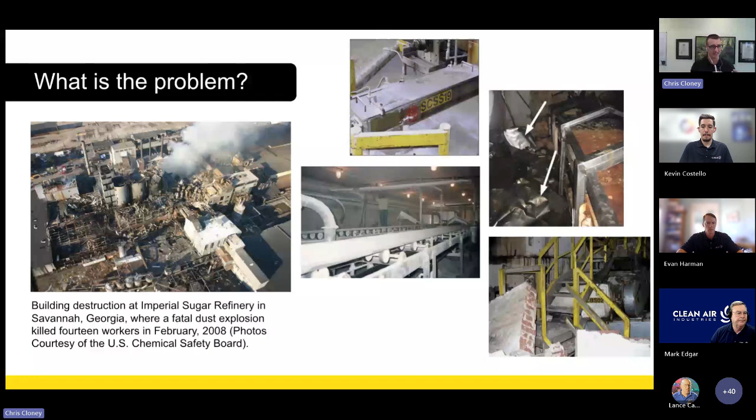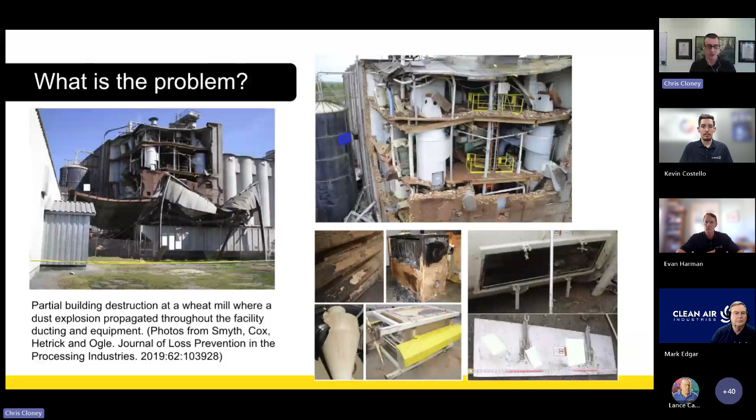You also have cases where you have explosions just in, we'll call them small, I mean that's not a small dust collector, but small pieces of equipment, bucket elevators. So you have large losses with secondary and tertiary and quad, the four-stage explosions, all the way down to small pieces of equipment. Cases where there's tragic loss of life.

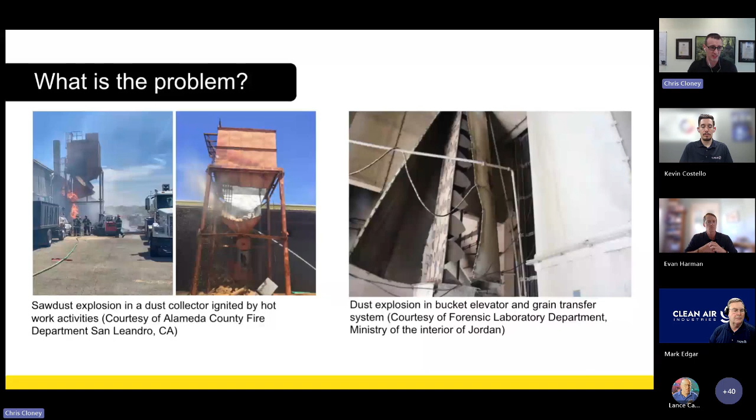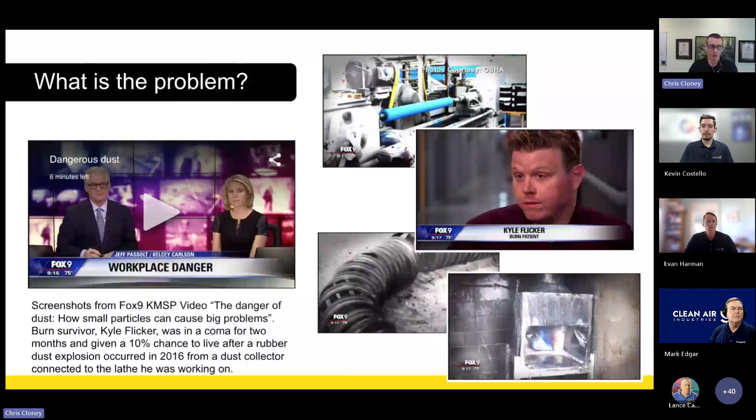The point of showing you these images and examples, and the Clean Air Industries team would be able to tell you this too, is that there's a wide range for combustible dust. Just in those short slides, just in that 3 minutes, I've talked about rubber, aluminum, wood, grain, talked about fugitive dust with dust all over the place, real lack of cleaning and collection, talked about no fugitive dust, still entire loss of a building.

We talked about personal safety, impact on one person. We talked about site safety, impact on an entire building. That's the big challenge we have for combustible dust in general: we have a lot of different ranges of scope, a lot of different ranges of size, a lot of different materials and industries that we're working with.

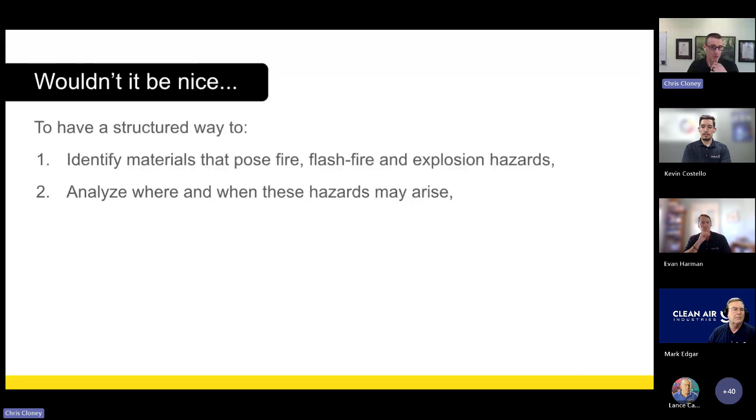So the overall summary then is, wouldn't it be nice to have a structured way to identify the materials that cause the hazards in the first place, to analyze where and when these hazards come up, to evaluate what safeguards are needed, and then recommend and track progress against improving these safeguards. That's the sole purpose of the dust hazard analysis process as outlined in the NFPA standards: to give a qualified person that structured way to assess these hazards, given the breadth and width and depth of the challenges associated with combustible dust.

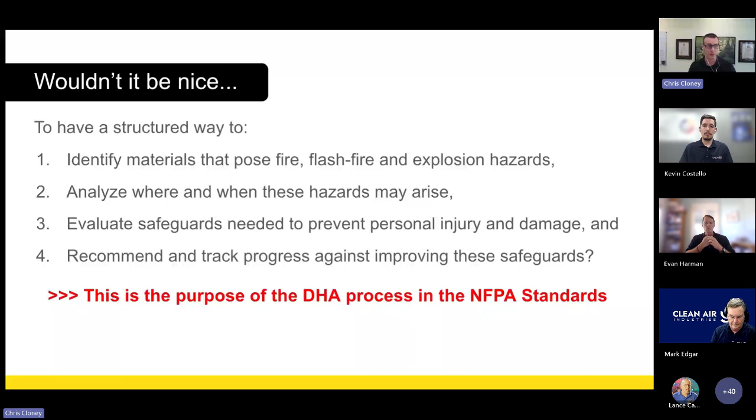There's been a lot of talk recently about NFPA 660. Some folks haven't seen it yet, so just in case you don't know, any NFPA standard is available online for free. Just go to nfpa.org/the standard number. I'm actually not sure that's true for any NFPA standard, but every combustible dust one, 652, 61, 484, if you go to that URL with the number, scroll down, you can click view free access. You have to create an account, so not completely free, you've got to give up your email, but you can view the entire document.

So if you have questions about anything in this presentation, or if you see something like, hey, I wonder what that section says, you can access it. I personally use NFPA Link, which I find very quick and fast compared to the old method of printing off reams and reams of paper and trying to scroll through or flip through the thing to find the material you're looking for. You can access it free today.

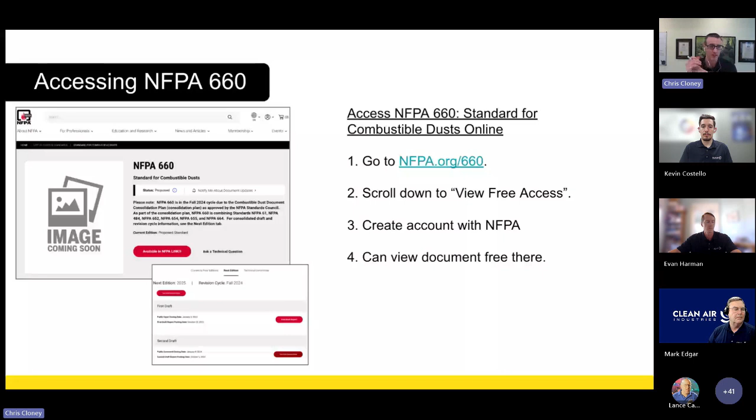This is the structure of what we'll call the past NFPA standards. 652 was the system that outlined that systematic procedure for completing a DHA: how to identify the hazards, how to assess them, how to address them, what management systems to put in place. And then it called out to the green squares, which are the commodity or industry specific standards for agriculture, sulfur, metals, wood processing, and other dusts. It also called out to the how-to standards, so deflagration venting, deflagration prevention, and the NFPA 70 electrical code. That was how the standards aligned. Each one of these was a different document, in a different order, created by a different committee.

And so it was good in a sense because you knew what was contained in it, but it also took a lot of work. You had to read all of 652 and then all of 61 if you wanted to understand the grain, what to do in a grain handling facility.

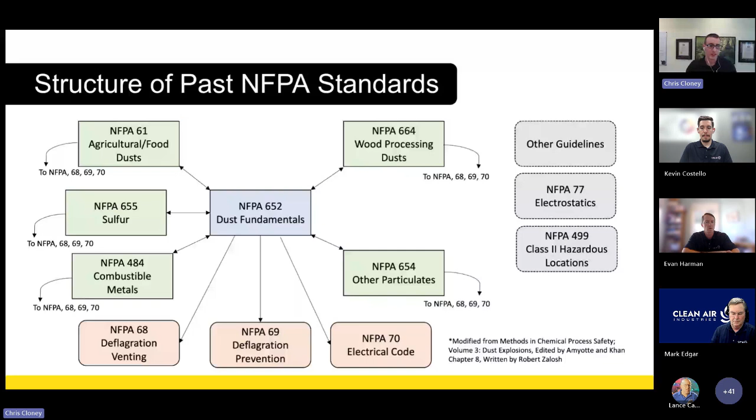The focus for NFPA 660 then was to combine the fundamental standard and those commodity and industry specific standards into one document. So the layout is chapter 1 to 10 is 652, then chapters 21 to 25 are the commodity specific standards.

The really nice thing about laying it out this way is that things are nested. So for example, let's say section 4.3 would be, I believe, the requirements for owners and operators in a facility handling combustible dust. That's what you find in chapter 4, section 3.

If you want to know what additional requirements there were for owners and operators in a grain handling facility, that would be chapter 21.4.3. If you want to know the additional requirements for owners and operators in sulfur, it'd be 24.4.3. All the chapters, all the sections are nested in this way, where you have something in the fundamental chapter, say bucket elevator protection, that's probably up in 9.8. You want to know bucket elevator protection for a woodworking facility, it'd be 25.9.8.

And it makes it a lot faster. If you want to know about bucket elevators between wood and the fundamental standard before, you'd have to read the entire fundamentals document and the entire 664 document. And because things didn't align, you'd have to try to figure out what that meant. So it made it a lot harder.

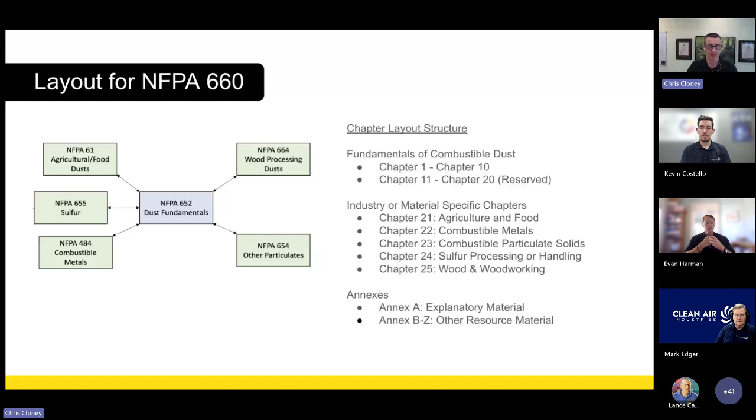These are the general requirements. This was the section I was actually referring to—I guess 4.1, not 4.3. I'm not one of those folks that has the chapters fully memorized and can rattle off the fourth subsection right away.

The requirements for owners and operators in facilities handling combustible dust really have three components. One is identifying the hazards—this is your combustible dust testing. The second is to assess those—this is your requirements for performing a dust hazard analysis. And the third is managing or addressing these hazards. This generally has two components: managing the hazards themselves in the equipment, and also management systems, more like emergency response, training people, those sort of things, housekeeping programs. Those go in a separate chapter.

Those are your compliance options. So that's really the three processes that you'll see in the NFPA standard related to dust hazard analysis: identify, do your testing, assess the hazards using dust hazard analysis, then go ahead and address those hazards with what was identified through the DHA process.

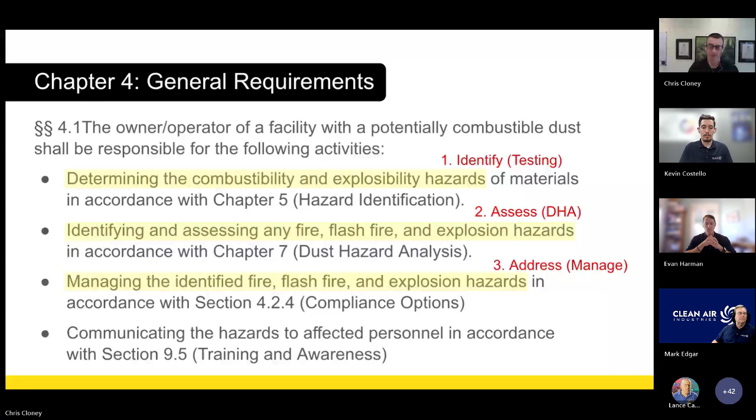In terms of testing, the first step in identifying the hazards is generally doing a screening test. This is a cheaper and faster alternative to doing a full suite of tests. If you get the results back from your screening and determine that you do not have a dust explosion hazard, then you don't have to go through the rest of the requirements related to doing a dust hazard analysis. If you come back positive from your screening test, then you go one of two routes, looking at understanding your explosibility parameters—those are the ones outlined like KST, MEC, LOC, MIE, and MIT in the slide here.

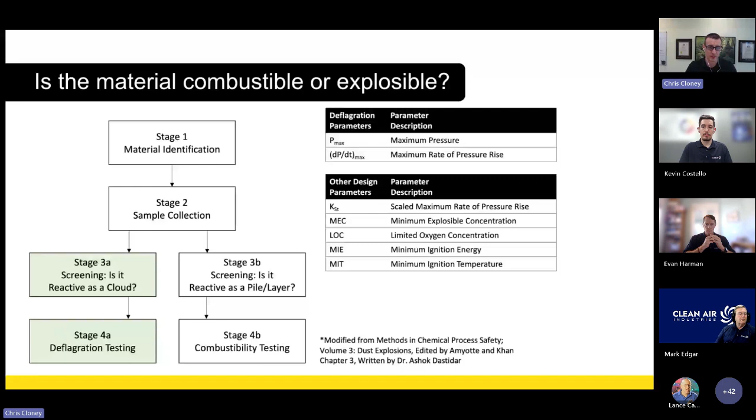And now, well, it always was—you had to look at combustibility and flammability as well. Now it explicitly calls out in NFPA 660, under particular circumstances, that you need to look at flammability parameters as well. So that kind of gives you an idea of the range of tests that may be required when you're looking at combustible dust. I think this is one of the cheat sheets that we pulled off and put in this kind of package that we have for these slides, if you want to grab those.

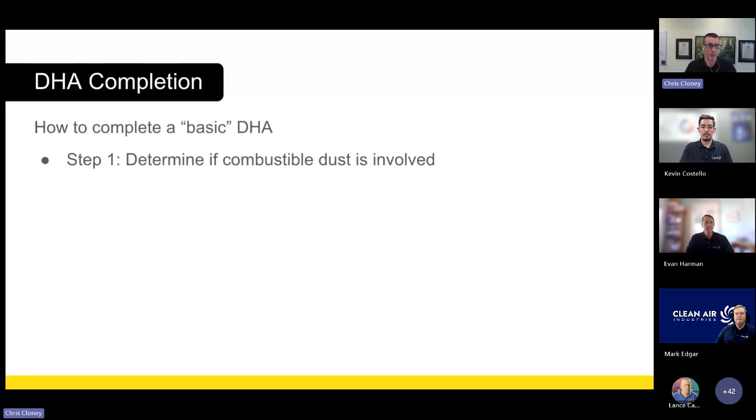I'll give you a really basic breakdown of a DHA process. One, determine do you have a combustible dust—do your screening test. If that's positive, then you break your processing operation into a list of nodes. Add nodes for rooms, buildings, and building enclosures. Evaluate the hazards, evaluate the safeguards, then document your hazard scenarios, your safeguards, and how they match up against the prescriptive requirements in the NFPA standards.

So in those chapters on management systems and equipment protection, think of this: if you had a really simple process, say something that's shredding metal components, you have an input hopper, a shredder, an output bin, and dust collectors attached to it. Then we take a sample probably from the dust collector, do screening tests on it, and find that yes, it is explosible.

Step 2 is the nodes. So you have your input bin, your shredder, your output bin, and your dust collector, plus the ducting between them, often treated as a node, and the room itself will be treated as a node. That's because you want to assess the hazards at all those locations.

The room itself, do you have fugitive dust in the room, or do you have the possibility for fugitive dust? If you do, then you need to evaluate the existing safeguards to prevent that, like dust collection, like having a housekeeping program. Same for the input bin and the output bin.

The input bin, maybe you're putting, I don't know, electronic boards in there. There may not be a combustible hazard, so you don't need to deal with that in your DHA, or you can exclude it. On the shredder side, maybe you do have combustible powder that's built up.

At the end of the day, you're looking to come up with that list of safeguards that are in place and comparing that to the prescriptive requirements in NFPA standards. That's the most basic approach. There are more complicated versions where you can use other DHA methodologies, risk-based assessments, performance-based assessments. This is a really simple example comparing against the prescriptive requirements for the NFPA standards.

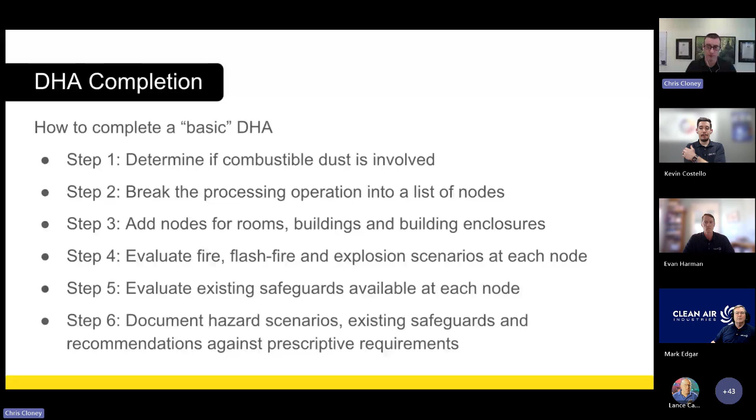We want to dive into some more detailed examples. There is one in NFPA 660, which I believe you can access from the free version. Just go to Annex B, and it gives you a worked-out DHA example, using a more scenario-based approach than the node-based one that I explained. But that will give you an example.

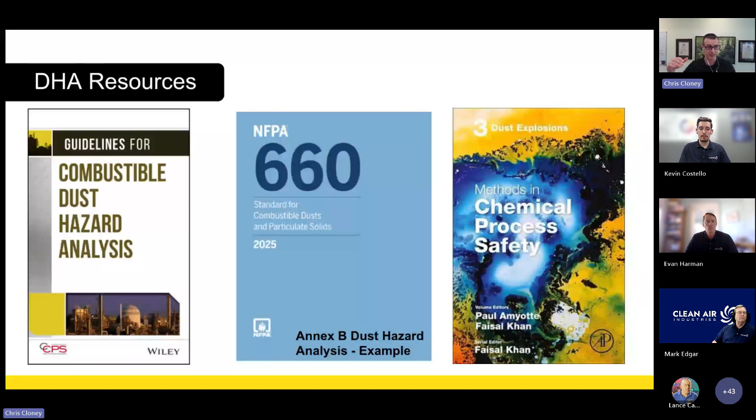So just to close out, this is the list of changes in 660 from 652 and the commodity and industry specific standards. I'm happy you don't have to say that all the time anymore. It'll be good when we don't say 652 plus commodity and industry specific standards - it's quite hard to say that.

But this list is actually in the front of NFPA 660 in the origin section. This tells you, okay, we tried to make this change with most things staying the same, but here's the list of things that actually did get changed with substance between these two standards. I'm not going to go through all of them, but I'll point out a couple that might be relevant to you.

There are requirements now for operational readiness reviews to be done as part of a management system. This is sometimes called a pre-startup safety review. If the equipment is down for a long enough time, or you're starting a new piece of equipment, there are requirements for what kind of review needs to be done before you turn that on.

There are new requirements to evaluate self-heating, thermal instability, and water reactivity under certain circumstances. That was always sort of included in evaluating fire, flash fire, and explosion hazards. Now it specifically, or explicitly, spells out when those would be required as part of your assessment.

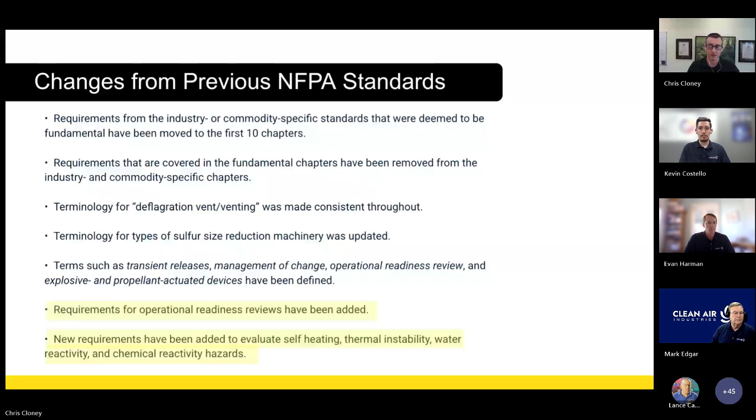There has been some text added in a few places on the level of protection provided by flame-resistant garments. This is something newer to the standard, but it's something we see when running our combustible dust incident database, in terms of the protection employees have when they're impinged on by a dust deflagration.

Really important - there are specific elements now on general safety training and job-specific training, and the frequency with which those need to be completed with your workers.

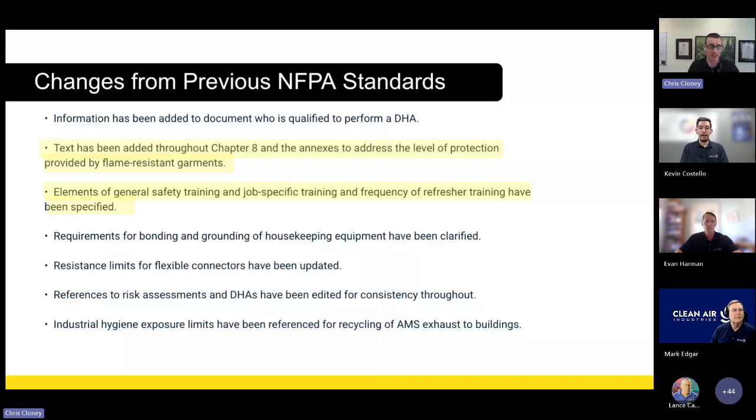And the last ones I have here: some guidance on responding to silo fires, and there have been more requirements added to ag and food in terms of the type of equipment that needs to be assessed during a dust hazard analysis.

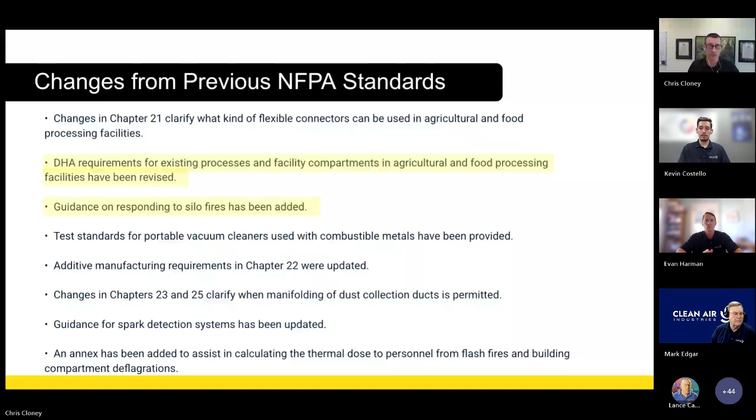So that's it for my contribution. Again, this was really meant to go through high level 660, what's new, and a little bit on dust hazard analysis, give you some resources you can walk away with, and really set the stage for the clean air folks to talk through things as well. So if you have any questions for me on those topics, please send them through.

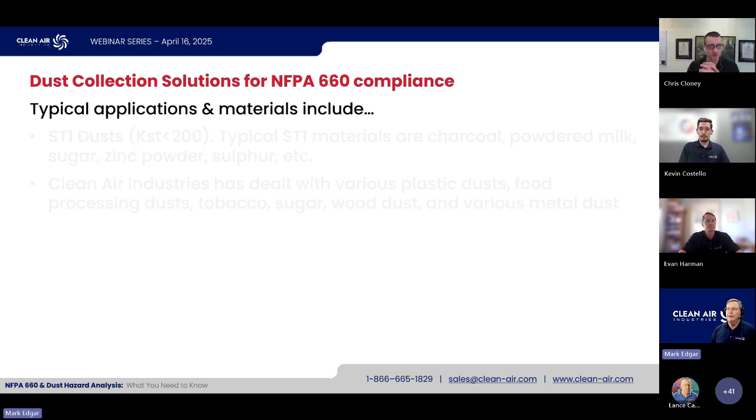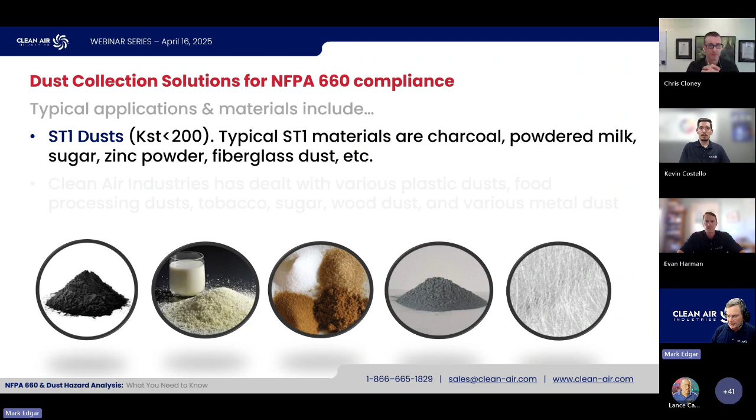All right. Good afternoon, everyone. So I'm going to talk a little bit about the equipment that we have that we provide for different solutions that would meet the NFPA 660 compliance. So typically dust that we deal with, ST1 dust mostly, with KST of less than 200. And those types of materials are like charcoal, powdered milk, sugar, zinc powder, fiberglass, those types of dusts. We can do ST2 dust as well, but that just takes some calculations to make sure that we are within the range.

We have dealt with other things, other types of dust as well, plastic dust, food processing dust, tobacco, sugar, wood dust, and various metal dusts.

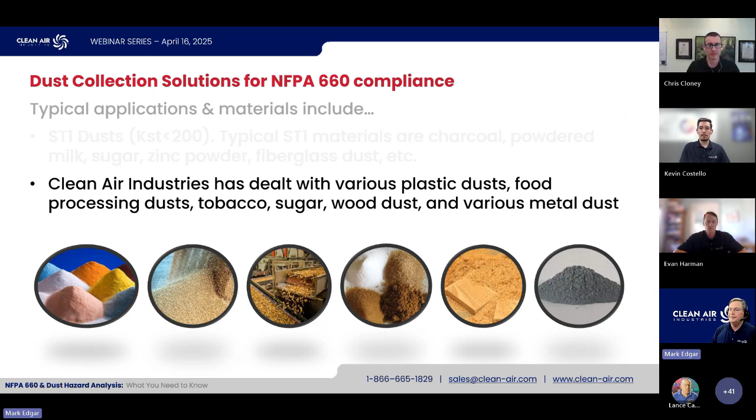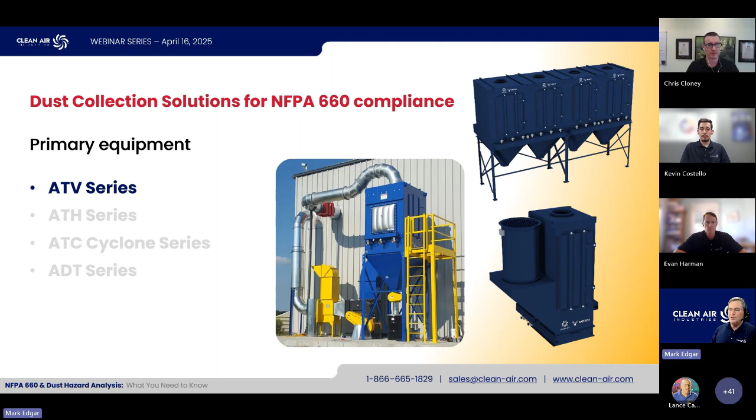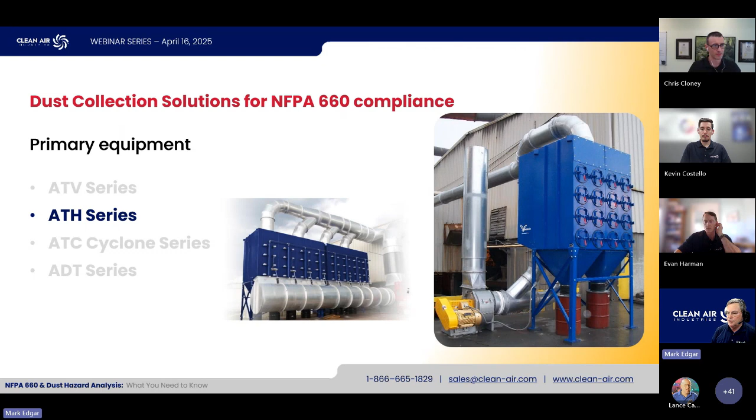So the primary equipment that we carry that we use for dealing with meeting the NFPA 660 compliance, the first one is our ATV series equipment, our dust collectors that has the vertical dust collector cartridge. Our second primary equipment series is the ATH, which is a horizontal cartridge collector. So the ATV series and the ATH series both utilize the same size cartridge. One is in a vertical orientation and the other is in a horizontal.

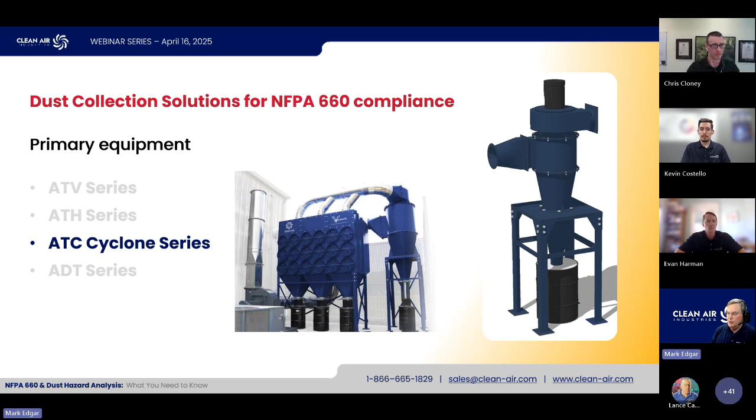We also have the ATC Cyclone series. Cyclones mostly are used for wood dust. Sometimes they're used for other applications. You can see in that one picture there with the horizontal unit that it's actually in a thermal spray operation. It was heavy sparks, and so it's being used to remove the sparks.

And then lastly, we have our ADT series, which is our line of economical dust collectors that run from 2 cartridge, 4 cartridge, and 6 cartridge.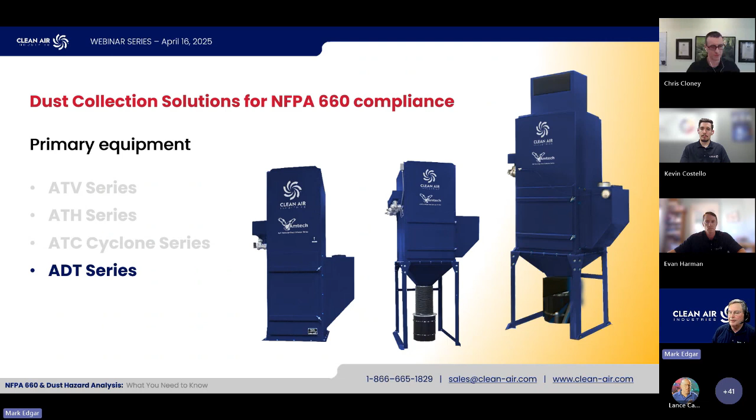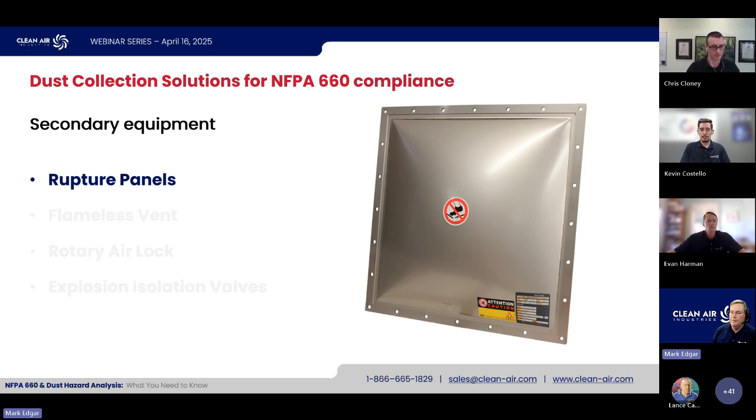So the secondary equipment that we would apply to our equipment to meet the NFPA 660 compliance is rupture panels, as you can see in this photograph here, flameless vent in case the unit is inside, rotary airlock, and just a reminder that the rotary airlock needs to meet NFPA 660 compliance. That is 8 vanes, a certain tolerance that's needed between the vanes and the housing, and that the bearings are outboard.

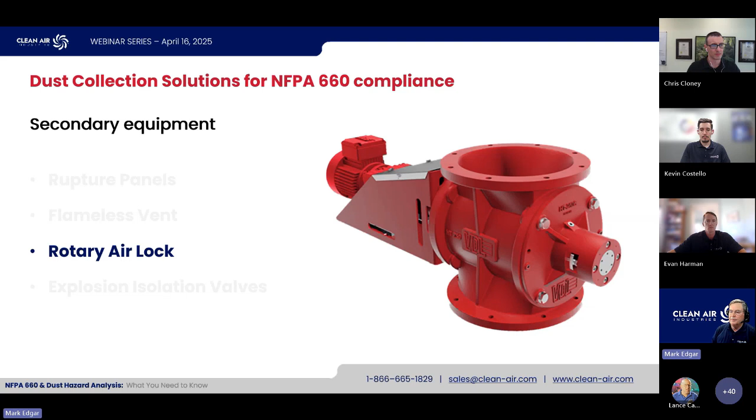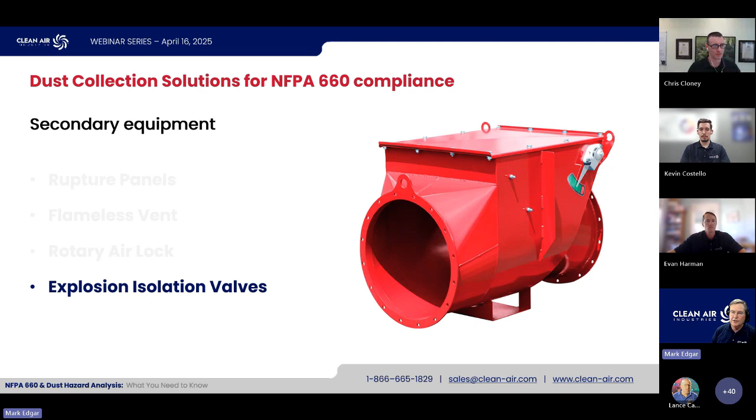Explosion isolation valves, and here you have what we refer to as a vigiflap. These would go on the inlet duct of the dust collector. And just a reminder that you have to have a certain distance depending on the size of that vigiflap, distance from the vigiflap to the dust collector. Also on the return air, you can return air into the plant, but you need a vigiflap or explosion isolation valve on that. And it will be a fixed flap system and requires a greater distance. Really important to get those distances correct, and also to make sure that the ductwork that is between the vigiflap and the dust collector meets at least 2 times the Pred of the dust collector.

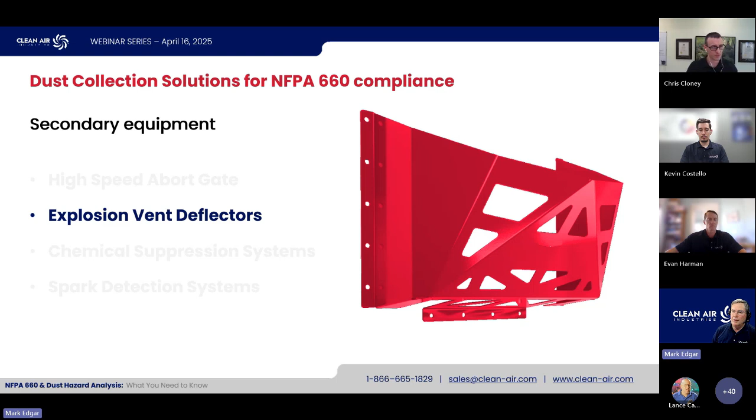Here's a high-speed abort gate, mostly used in wood dust applications. Here you see an explosion vent deflector that can be applied to the vent or rupture panel in the case of maybe it's pointed towards a parking lot or areas where people pass. So this can help shorten that throw of the flame.

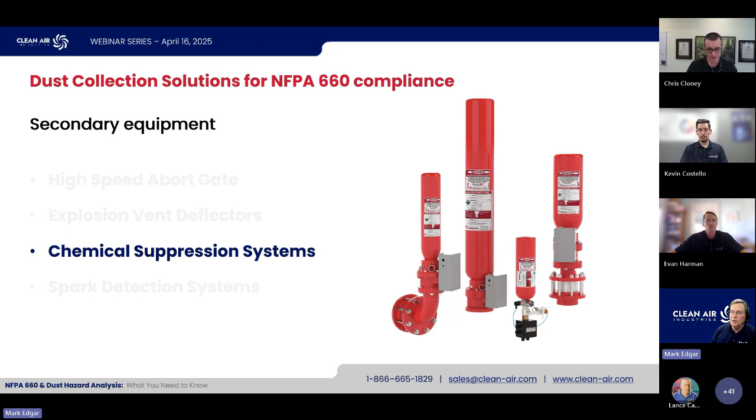Chemical suppression systems, we offer those too. Mostly we find those go into the food industry or sometimes plastics industry, mostly related to when either the dust that's been captured is being recycled, or that the distance from the outside wall to where the piece of equipment is significant, and it's just easier to have it inside.

And then finally, spark detection systems that could be utilized as well. So we offer all of those secondary pieces of equipment that can be applied to our dust collectors.

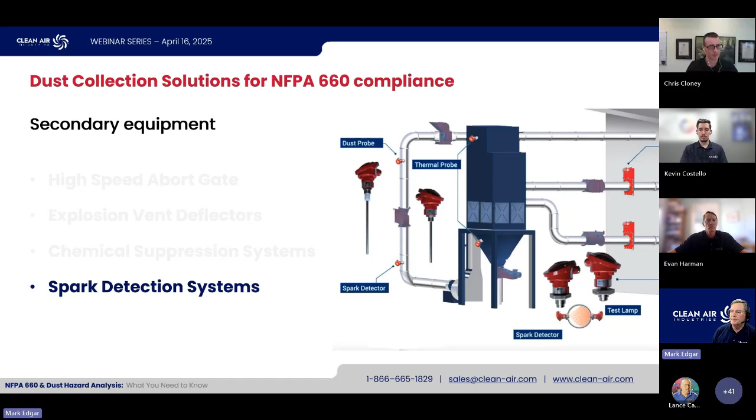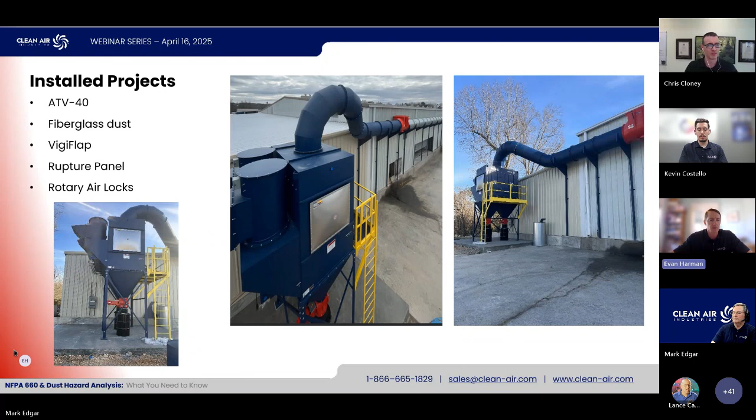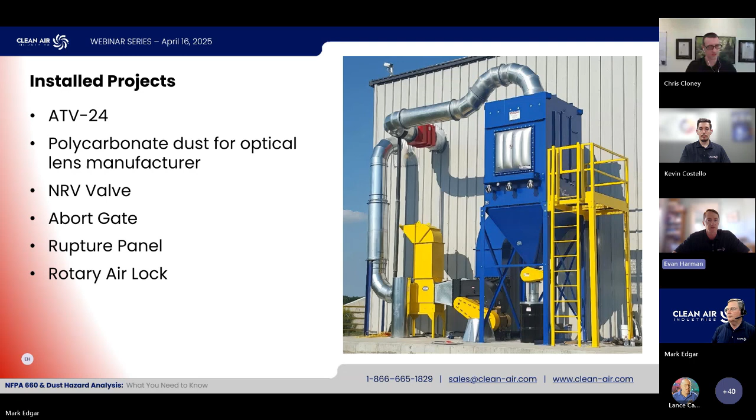Here we've got an ATV24. It's on a polycarbonate dust application for an optical lens manufacturer. Again, on the dirty air side there, you'll see an NRV valve, abort gate. You've got, of course, the rupture panel on the front face there of the dust collector, as well as the rotary airlock at the bottom.

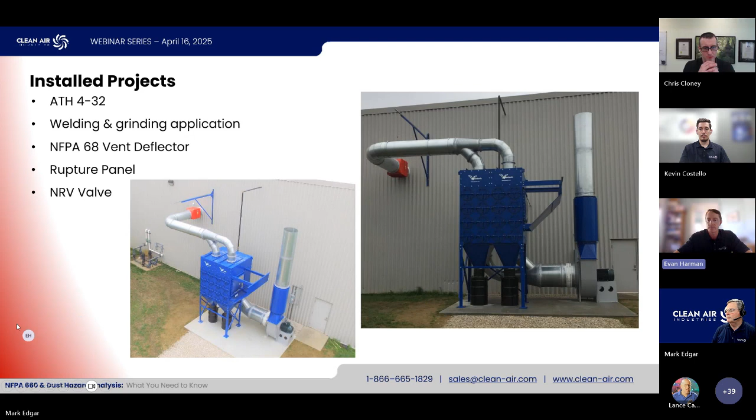One thing I would like to point out is a lot of these pictures you'll see today, or have seen, are applications where they are outdoors. We do have the capability, of course, to do indoor applications. You heard Mark talk about the equipment offerings we have that allow for that capability. So what we could do is just have a site visit where we'd come out, take a look at the application, and basically help you determine whether that's an instance where we'd have to drop the dust collector outdoors or indoors. We don't always have unlimited floor space with a lot of these applications, but also there's the challenge of not being near an external wall. So we would basically help you analyze what would be the best, most cost-effective option for those applications.

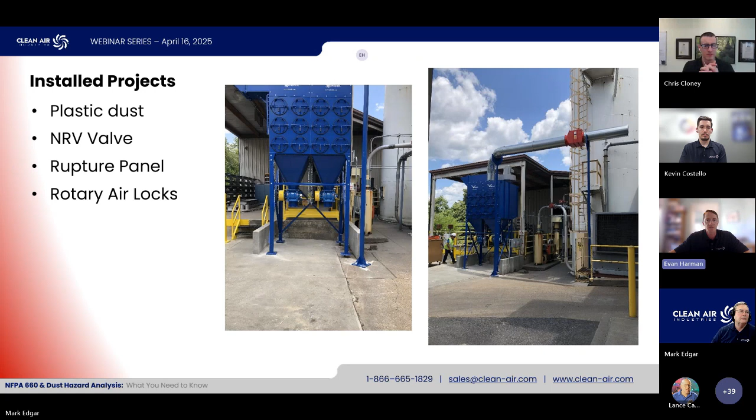Thanks, Evan, and thanks everyone for joining us today. I would hope that some of our attendees today will recognize some of these projects we've done. I'm going to finish out speaking on one more installed project, and then some current projects we've been working on here at Clean Air Industries.

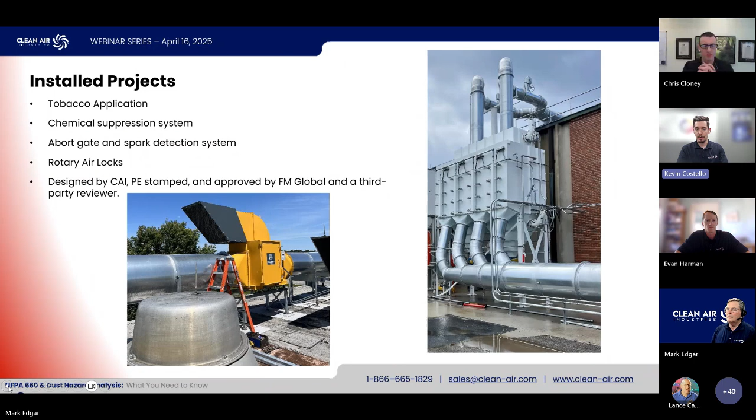So this unit is a pretty custom unit that was a tobacco application. It contained a chemical suppression system that was food grade compliant as well, on the dust collector, as well as the inlet and outlet ducting. There's also an abort gate with a spark detection system on the clean air discharge that was returning back to the plant. This unit also had rotary airlocks installed on it as well. We designed this unit. We had to have it PE stamped and also approved by FM Global and a third-party reviewer for this customer.

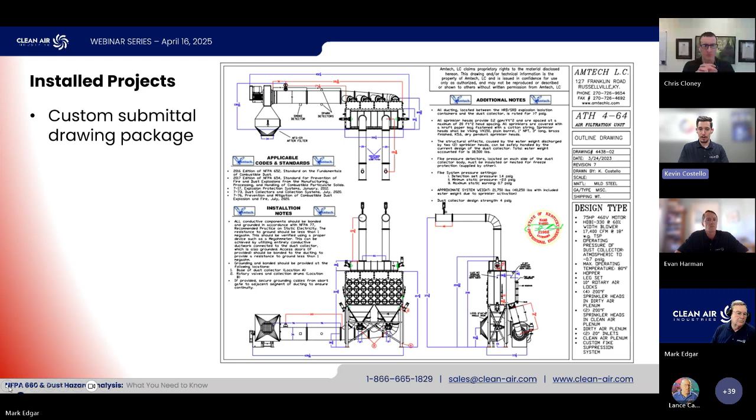This is actually one of the submittal drawings for that project, and this just goes to show some of the capabilities our engineering department can help our customers, or distributors, or any prospective clients with in getting these projects approved, where you have to make sure your T's are crossed and your I's are dotted to make sure everything is safe and compliant like it should be.

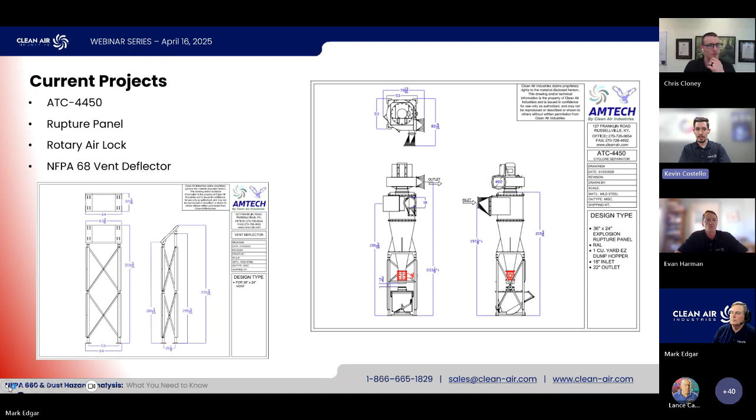Going to some of our current projects, this is a 44-inch, 50 horsepower cyclone with a rupture panel, rotary airlock, some of your standard devices, as well as a vent deflector designed and fabricated by us here at Clean Air Industries that's built to NFPA 68 standards.

There's also a current project we have of a 44-inch cyclone that does not have a blower because it's actually going on the inlet of a cartridge dust collector. It has a rupture panel with a bursting sensor as well as a rotary airlock and also a pressure sensor mount that we integrated on this cyclone to be intertwined with the dust collection system on the cartridge dust collector that's going with this cyclone. So we're very flexible. Our engineering department can help in any way we can to make sure these systems get designed right and are to our customers' needs.

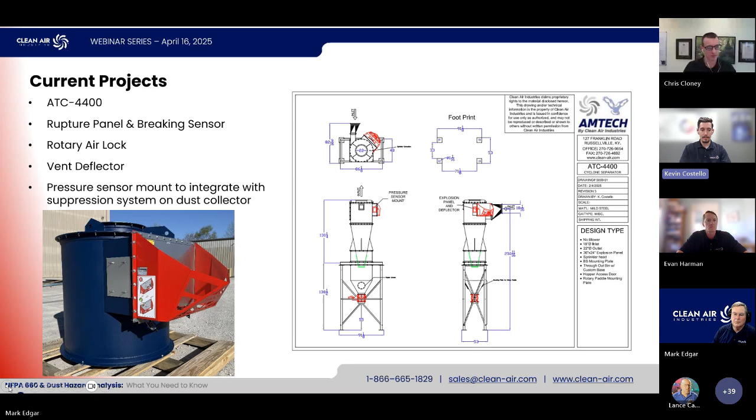The question is, what is being done to educate the manufacturing space? I have seen universal ignorance, without exception, of anything to do with these requirements. Is this something that seems to be a problem in the industry, Chris? Are you seeing a lack of education in the manufacturing sector?

Yes, I don't know if I'd call it universal. I mean, there's 38 folks on this call that get it. But it is a big challenge. There are lots of sites that either have no requirements or not a full understanding of the requirements that are needed. You saw a lot of the clean air systems that are fully protected. It's not uncommon to see a site that would have only some of those protections or some not applied in

a very safe manner. Even the deflector plate example that I think Evan showed, or maybe Kevin showed, where you see that vent pointing directly at an egress or at an emergency exit. Those are all challenges that you see quite commonly, and that's the importance of doing webinars like this. So yeah, not universal, but still a challenge, still something that we're trying to go for.